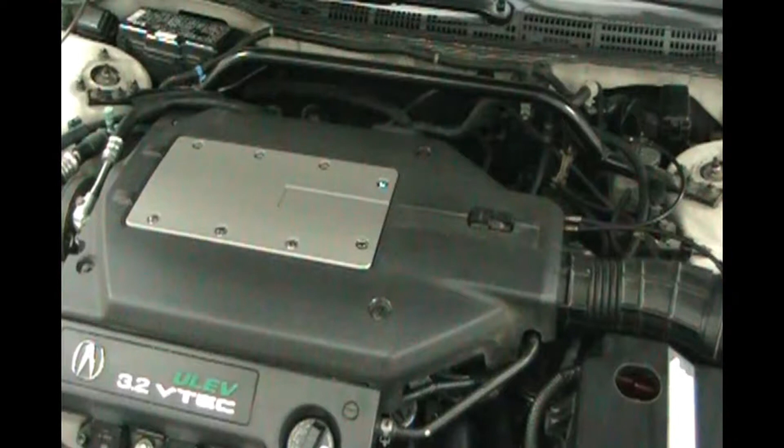So today we're going to put a set of valve cover gaskets on this 3.2 Acura TL. It is a 2000 model year. So you want to do this occasionally, maybe every 50 to 100,000 miles, to prevent oil leaks inside your spark plug tubes and oil leaks from coming down here. Like I say, start high, work down to find oil leaks.

We're going to change the valve cover gaskets today and also adjust the valves while we're in there. It's a pretty big job to get torn down to get inside there. So once we got it open, we're going to put in a fresh set of gaskets, and we're also going to adjust the valve lash. And like I say, plan on 3 to 4 hours depending on how much cleaning you want to do as you go. Okay, so 10 millimeter on the 4 corners, lefty loosey.

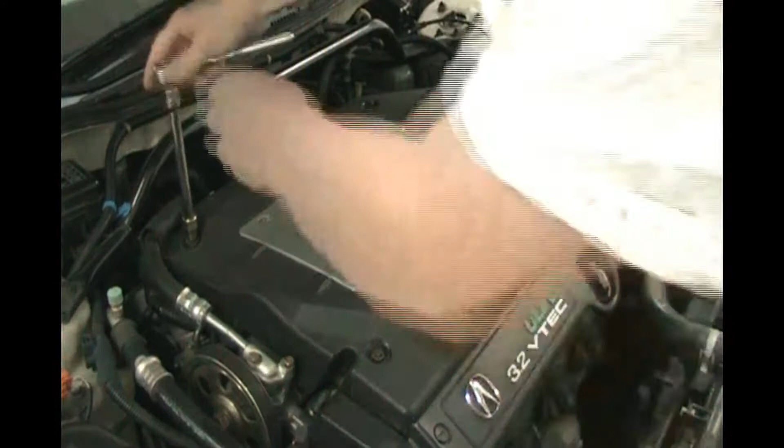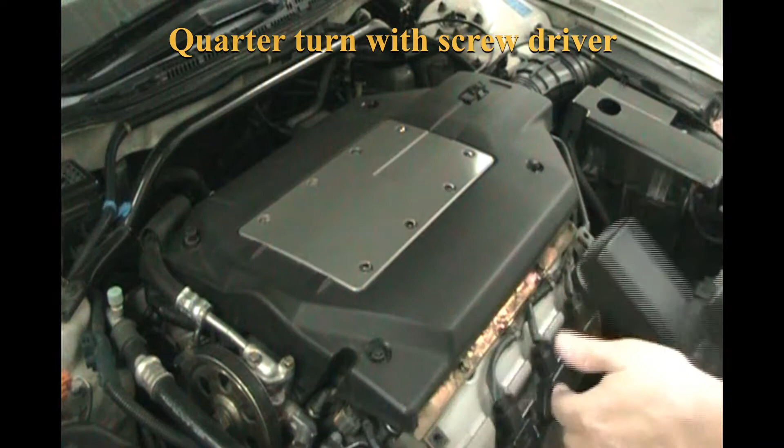Okay, flat screwdriver here, quarter turn on these two, take that right off, take that right off. So next thing we're going to do is take the air box and snorkel off. So the air box is just a number 2 Phillips. You can use a socket if you have the right size, or just a number 2 Phillips. It's 4 screws.

Okay, this cruise control cable is just held in place like that. Get out of the way. Airbox is almost loose. Okay, that's loose. Now there's a screw right here for the throttle body intake. Number 2 Phillips. Little hose out of the way. Pull this hose out. There.

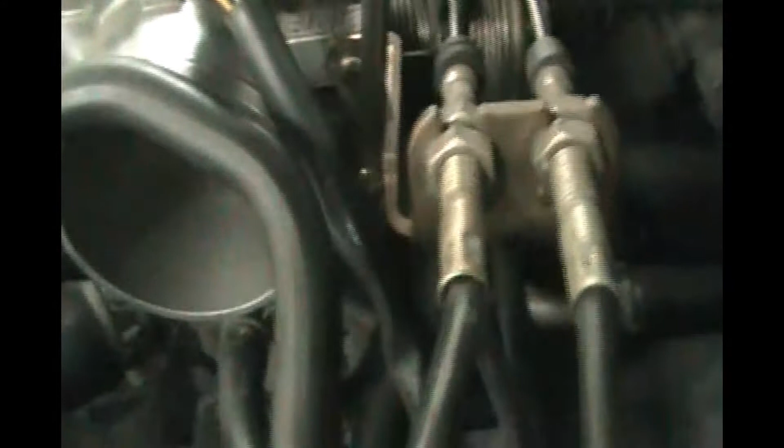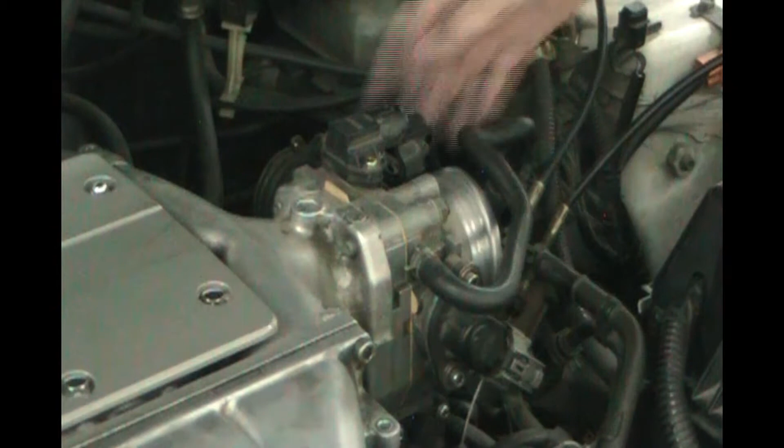We're just going to take the throttle cables off next so that we can get into here. So number 2 Phillips, 2 screws here that hold these cables. Then you pull this back and undo the end of it. So let me get those screws off. Okay, so we pulled the throttle forward and we got the two little ends off there. That's what they look like. Set that aside.

Now we're going to take the top cover off the intake. Looks like 1, 2, 3, 4, 5, 6, 7, 8, 9, 10. So 10 millimeter nuts. Oh, actually they're bolts, so a couple of them are nuts, some are bolts. This one's the nut. I won't bore you while I'm unscrewing all 10 of those. Okay, so we got the 8 bolts and 2 nuts off. Let's take this top cover off.

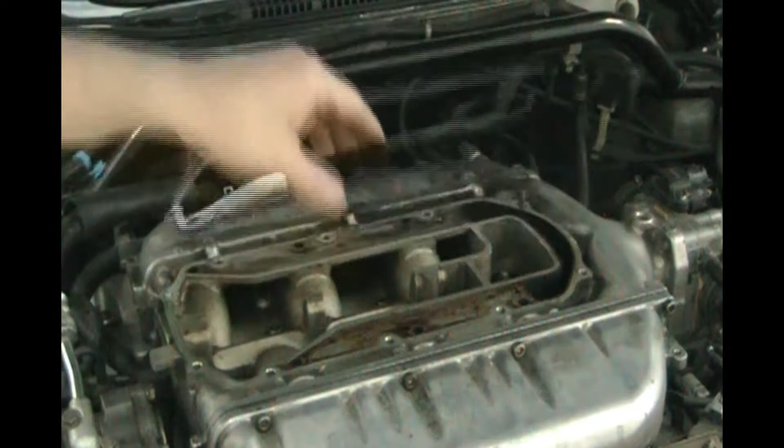And this is what is known as the beehive to Acura Honda technicians. So this can get all gummed up with carbon and it needs to be cleaned if you got EGR problems. And this is a metal gasket that is reusable, and it does need to fit one way. Set this cover down. So I notice this end has to go towards the throttle body. Don't turn it this way, get it upside down, because you'll see some cutouts here and they have to match up. Don't turn it over the wrong way. It'll be apparent to you when it's the wrong way.

Mechanics have done that time and time again. They've gone, well, I guess you can't go this way with it, the holes don't line up, but you could accidentally put it that way, which would be really not good. So I'll set these aside, but this is the beehive that occasionally needs cleaning. This one, the passageways, even though they're black, they're not plugged anywhere, so I've cleaned that before.

There's a couple things in the back to unhook. There's a vacuum line here to unhook. There we go. So that hit the ground at least. So I'll get that off the floor. Okay, so this vacuum hose is actually the positive crankcase ventilation valve, PCV. So we'll set that aside.

So we have an air intake temperature sensor to unplug here. Just squeeze the connector and pull it off. Got a vacuum line here, skinny one. Just put that up here so I don't forget to plug it back in. And we got a, looks like a brake booster vacuum line.

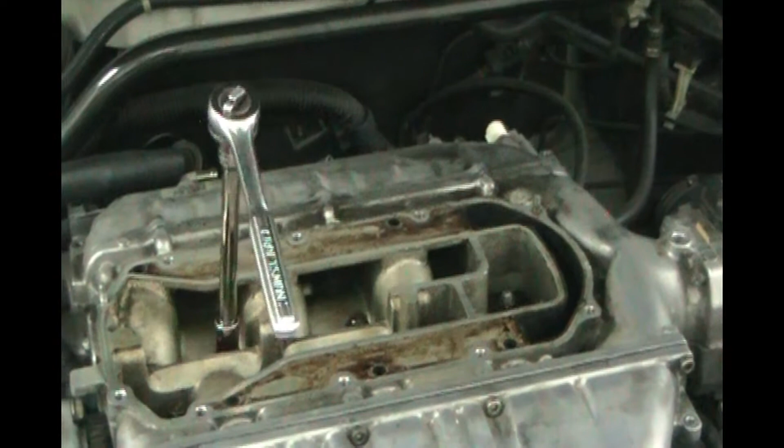Okay, so that's off. Okay. So now there are several bolts. Let's see. 1, 2, 3, 4, 5, 6, 7 bolts and 2 nuts down inside there. They're a little bit oily, but we will take those off. So these are 12 millimeter. And they're on there pretty good. And they are torqued with a pattern, so let's get all those out.

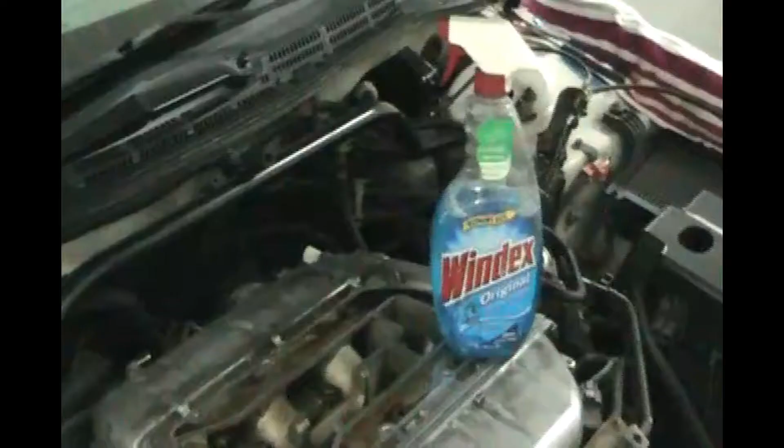Okay, since it got a little greasy and oily, you know what really works as a good hand cleaner? Windex. Spray it on a paper towel, wipes all the grease and oil right off your hands.

Little plug for Windex. Okay, so we got 2 more electrical connectors on the throttle body, throttle position sensor, and then the idle air control valve, IAC. That's the bottom one. And that has been replaced on this car probably a year or so ago. That's a little tight. Let me get a screwdriver to wedge in there.

Okay, so idle air, throttle body, throttle position sensor, those are unplugged, out of the way. Got all of our nuts and bolts in there loose. And looks like we have one more vacuum line right here to come off. Some pliers. Okay, one more vacuum line to take off here. Boy, that rubber hose is getting pretty dried out. Not so flexible anymore. That's okay. It doesn't need to move, so we'll just set that aside.

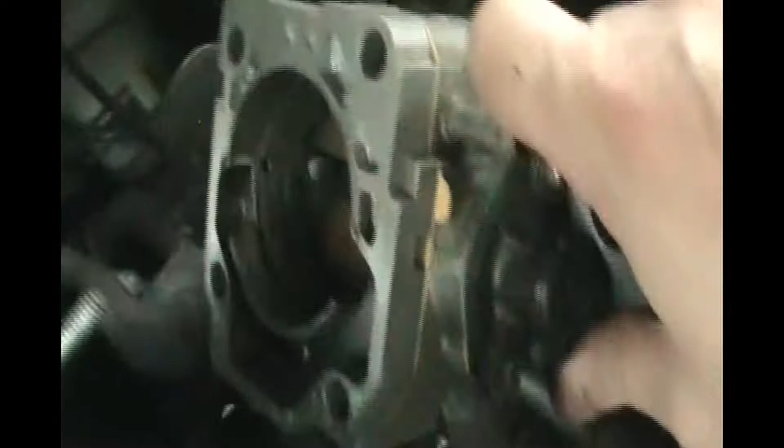Okay, without taking off the manifold, I was able to slide it off those 2 top studs, tilting it down a little bit and pulling it off, and just set the throttle body aside. And you know, you could clean it while you got it out, paper towel and some Gumout or something, throttle body cleaner. This one's been cleaned before, it's not too bad. You can clean the front side. Front side's pretty clean. Back side is usually a little more dirty, but you can clean that while it's out of there. And you can see the 2 water lines there, 1, 2, in and out.

So there is a gasket on here. It did not tear. That's good. It's a relatively new gasket. And if it tears, then that's the time to replace it. They're only like $1 or something.

Okay, so we're about to lift the intake manifold off. I want to make sure I gave you the right count before. So as far as bolts, there's 1, 2, 3, 4, 5, 6, 7. And then nuts, there's 1 at each end, 2. So there's 7 bolts and 2 nuts. So we'll set those aside, and then we'll lift this intake manifold by holding these 2 throttle body studs on this side and this little boss tab on the other side. It's already loose, we'll just lift it off of there.

Okay, so lifted the intake manifold off, set it on the floor. It's one big piece. I don't know, probably weighs 20 pounds. And now we got the lower intake. And you want to cover these with some paper towels or cloth or something. You do not want nuts, bolts, tools falling down inside there.

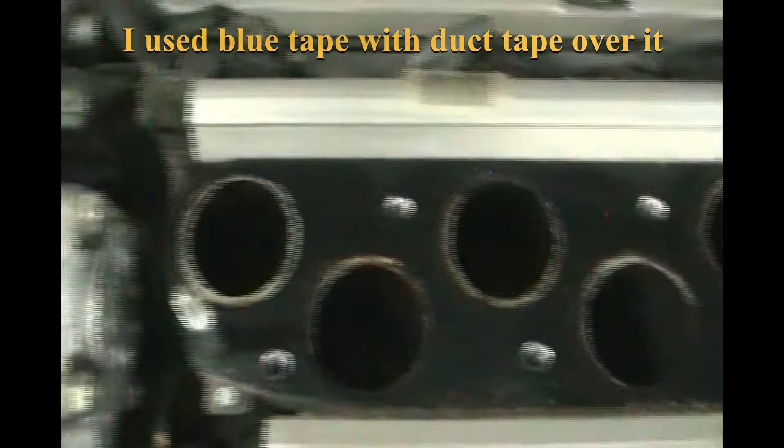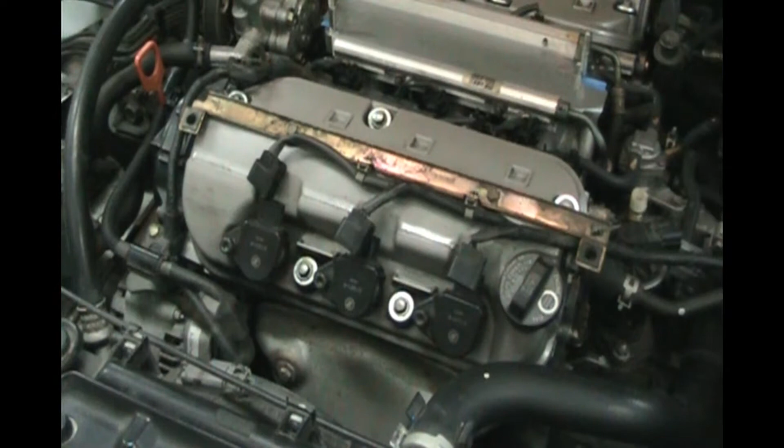Okay, now we're going to use a number 6 hex key to loosen the set screws for the coils. Let's just unplug each of these, squeeze the connector, pull up. Do that for all 6. Since this is a Japanese car, of course, when I said number 6, I mean 6 millimeter metric hex key.

So we got the set screw out, and for the coil, just give it a little wiggle, slide it out. And you want to make sure that this boot comes out with the coil. Make sure it's not stuck down there on the spark plug.

So we need to get this rail out of the way that holds the electrical connectors for the coils. So this is 10 millimeter. Just 2 bolts hold that in. Swing this up and out of the way somewhere, over by the battery.

So let's get this air hose off of here. That'll be fine. Let's get that out of the way there. Now we take these 1, 2, 3, 4, 5 bolts off. They are 10 millimeter.

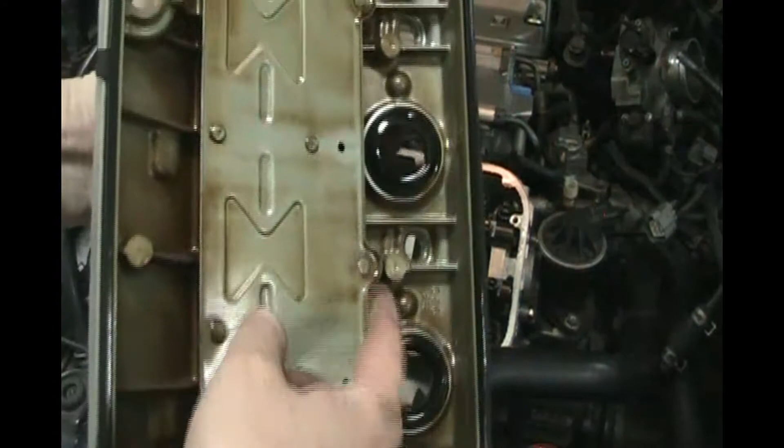This is a sideways V6 engine, 3.2 liters with 4 valves per cylinder. So you have 2 intake, 2 exhaust. This is cylinder 1, 2, 3, 4, 5, 6. So this is cylinder 4. And you got 2 intake, 2 exhaust. And the camshaft goes right through there. And this is a VTEC engine. So based on oil pressure, there's a VTEC actuator, and then it can move on to different cam lobes at higher RPMs. So we're not messing with VTEC today.

The only thing we have to do today is replace the valve cover gasket, because we don't want any leaks coming along this edge here. Some of this is road grime and some might be leaking oil. Remember what I said about finding an oil leak? Start high, eliminate all leaks up high, because you could have oil dripping down that you think is your oil pan because it gets to the bottom, and it's not your oil pan leaking. It could be the valve cover gasket leaking. So start high when looking for leaks.

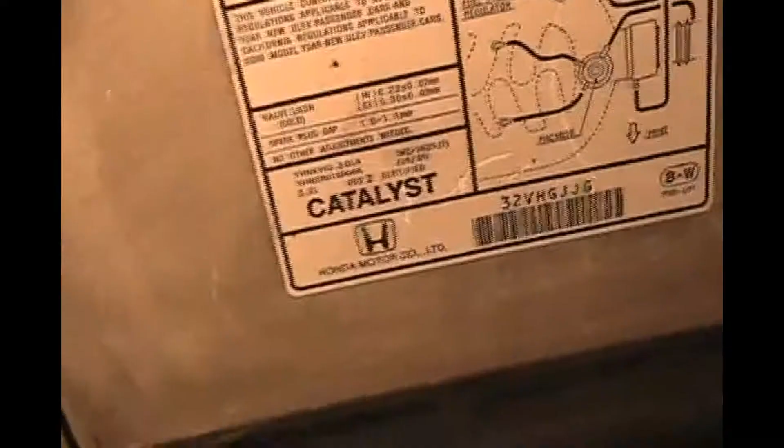And when we adjust these valves, we are going to look at the hood. It says valve lash intake. Let me get a close up of that for you. So on this hood it says cold, so we have to have a dead cold engine. Valve lash intake is 0.22 plus or minus 0.02 millimeter. Exhaust is 0.30 plus or minus 0.02. So on our feeler gauges we want a 0.22 for the intake and a 0.30 millimeter for the exhaust.

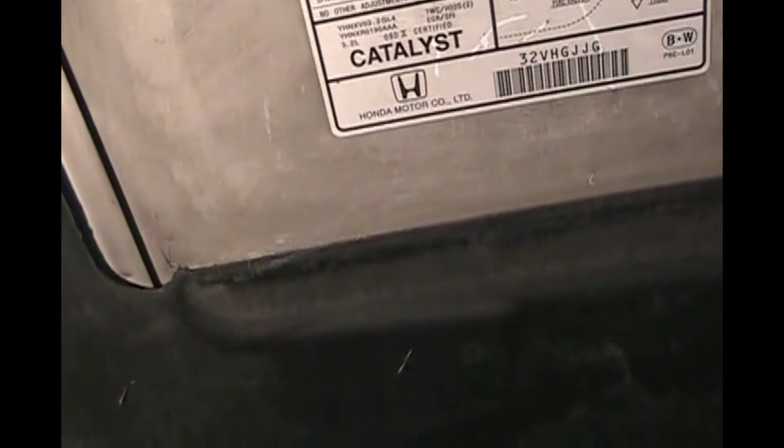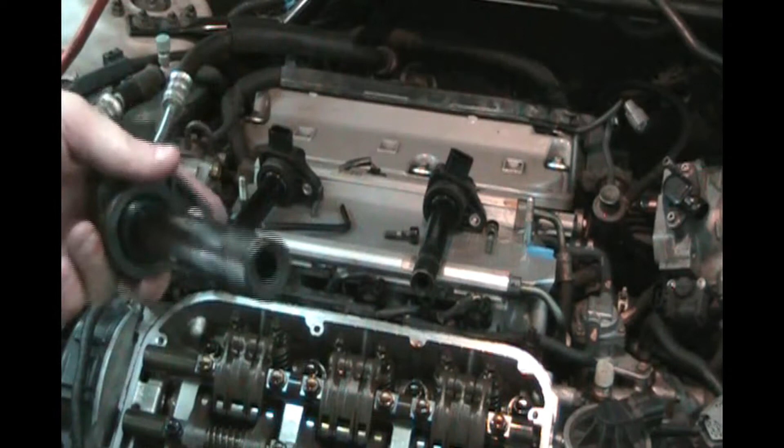Okay, so the other thing that you want to take care of when doing the valve cover gasket is, this is the number 2 cylinder coil. There's a little bit of oil that got through into the cylinder, not much. I'll show you on the front bank, there's an oil seal around here on the valve cover, and if that goes bad, oil can come from here and get into there, and that could affect your spark. So if this was swimming in oil, that could be a problem. There's just a tiny bit. It doesn't look like it got up inside, so we caught this in time, and we'll be taking care of that problem today.

The rear valve cover is a little harder to get off because you got this power steering in the way. There's a 10mm bolt right here that we can take out, and you got this electrical in the way, so there's a 10mm bolt we can take out, and both of these can just be pushed up enough to pull this up and out. Okay, so the same thing on the rear bank. This one here is the only one with a short bolt, so I'm going to put some tape and mark that as well on the rear bank.

Okay, so on the plastic electrical rail, there's actually two bolts. There's one over here. I just taped it up here so I can remember to put it in later. And there's also one right here. So you need to get this one out as well. And then we can lift up the electrical and get that out of the way. Okay, so I just used a piece of string, lifted this up and just tied it out of the way. And we should have enough clearance to lift this cover up and out of there. There we go. We've got all 5 bolts out. That gasket is sticking on there, so that's okay. We're going to replace it with a new gasket.

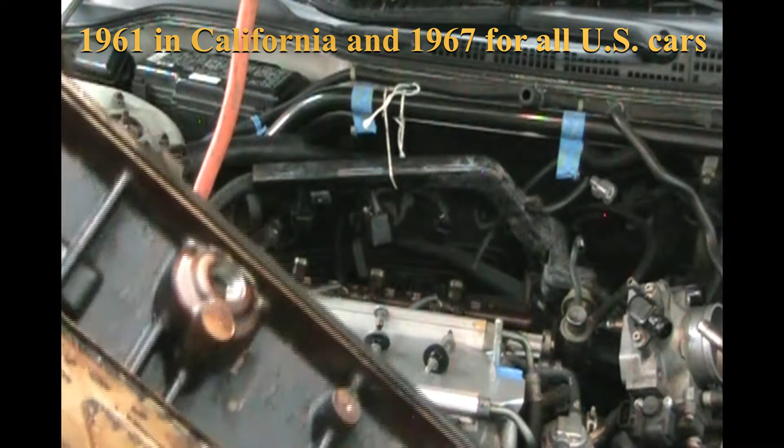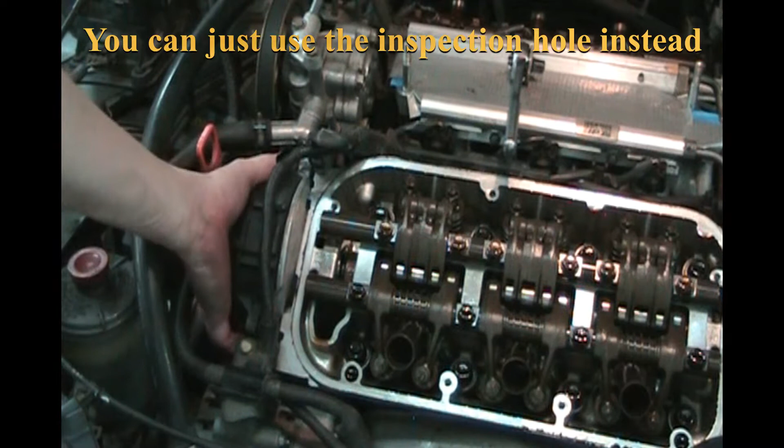It's a pollution control requirement since 1961 in California and 1967. So we'll clean it up as best we can. That's just what happens with high mileage. So on the front bank, I'm going to take off this cover. There's 5 bolts that are 10mm, and then you slide it up and then away.

Well, there's the dipstick for the oil that's in the way, so we might have to loosen that bolt. Let's see if we get it out by wiggling it a little more. Yeah, it looks like the dipstick's not the only problem. This belt is also a little bit in the way, so I might have to loosen the belt to get it off. Let me do a little more wiggling. Okay, so I got the bolt out for the dipstick.

You know, it's really unfortunate. If Honda had just made this dipstick tube 1 inch shorter, and the stopper on the dipstick would be adjusted for that 1 inch shorter, then this cover would clear it without having to remove that bolt that's really hard to reach.

So we have had to remove the power steering belt and the bolt for the dipstick tube just to get this to clear the pulley. What a pain. So there's 5 bolts, 1, 2, 3, 4, 5. Then this cover comes off. There is a little window that you could look through here, but I've never found that very useful. And for this video, I want to have the pulley exposed so I can make it clear to you what we are doing on the pulley.

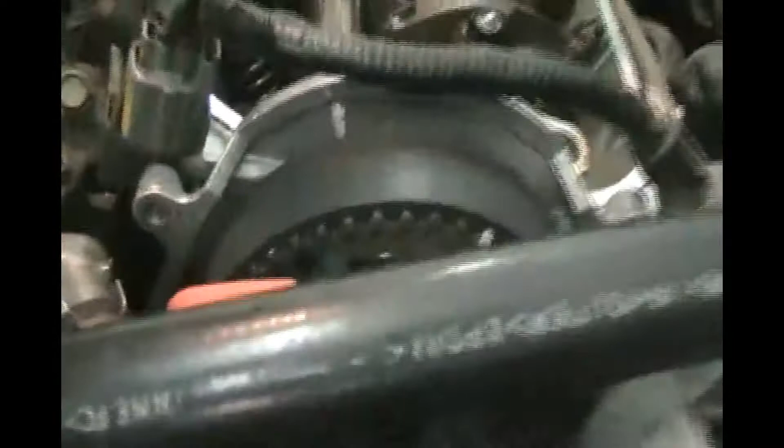So what we want to do is move the engine so that we have this number 1. There's markings on here, there's 1, 2, 3, 4, 5, 6 on this pulley, and I'll show them to you with a close-up in a minute. We want this number 1 top dead center, straight up and down, so that we can do our number 1 cylinder valves back here. We need number 1 at top dead center. Just like when you're putting on a timing belt or statically setting your ignition timing, you want number 1 first, top dead center.

So we have our right front tire. We turn the steering wheel all the way to the right, and we have a 19mm socket through that hole there. It's flexible plastic, so you just push through. And we got some extension bars, and we got a torque wrench. If I get far enough back to show you what we got here. So the car's on the ground, so turn the steering wheel all the way to the right and put your 19mm with some extensions. I just used a floor jack to make it easier to turn this.

And we want to turn clockwise until we got number 1 at top dead center. In this case, I'm going to go a little bit counterclockwise to take a shortcut to get started. So I'll go a little bit past it. There, a little past it. Now I'm going to go clockwise. So on this wrench, I'm going to push towards the front of the car, that's clockwise. And then I'm going to watch the marks on here line up, going clockwise, clockwise.

We want to be straight on looking at that. Get the dipstick out of the way here. Let's see if I can get the camera in there.

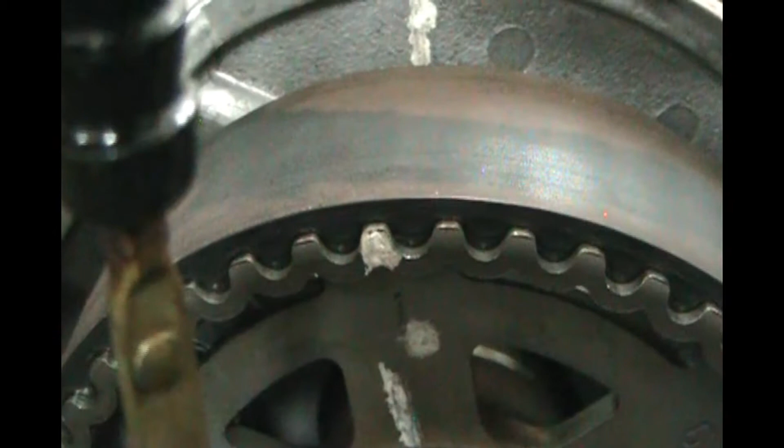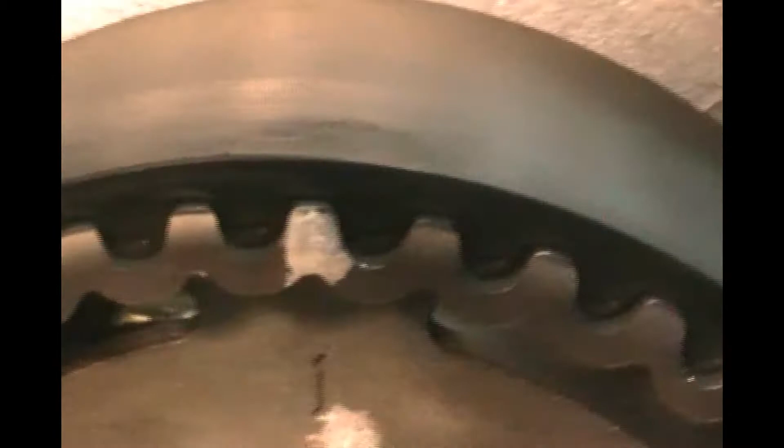There. Okay, number 1. And you see the number 1 marker on the pulley. Let it focus there. Let me get some more light for you. Number 1. And we want that to be lined up with top dead center.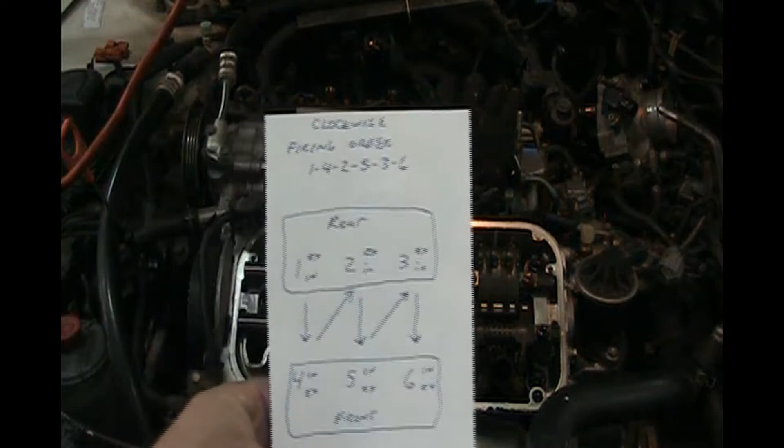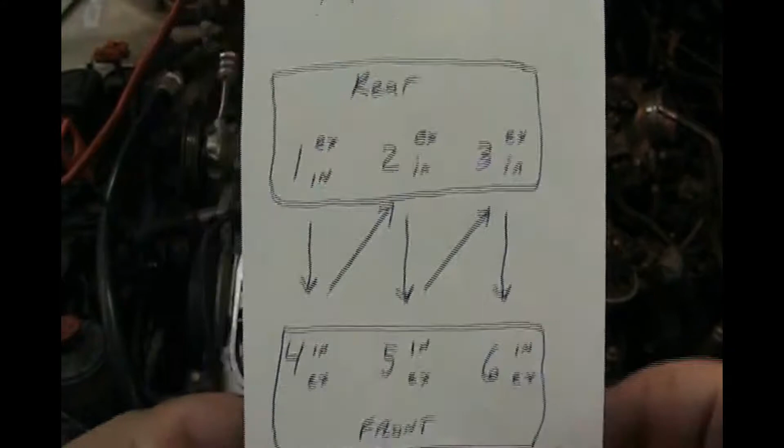Now we are ready to set the number 1 intake and exhaust. So on this engine, see if we can focus on this paper here. We always want to turn the engine clockwise, and the firing order is 1, 4, 2, 5, 3, 6. So if you look at the engine with the rear cylinders, number 1, 2, 3, front bank 4, 5, 6, and this is where the belts are on this side.

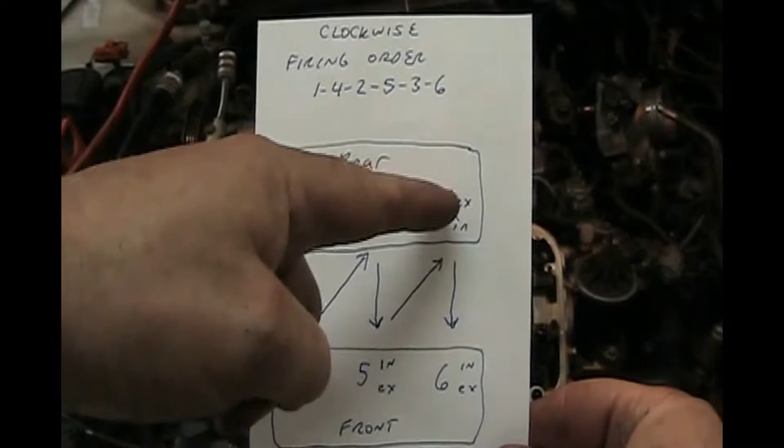So just like we set on the firing order, hopefully that's in focus, we're going to set number 1 intake and exhaust, then 4, 2, 5, 3, 6. That's how this Acura engine fires.

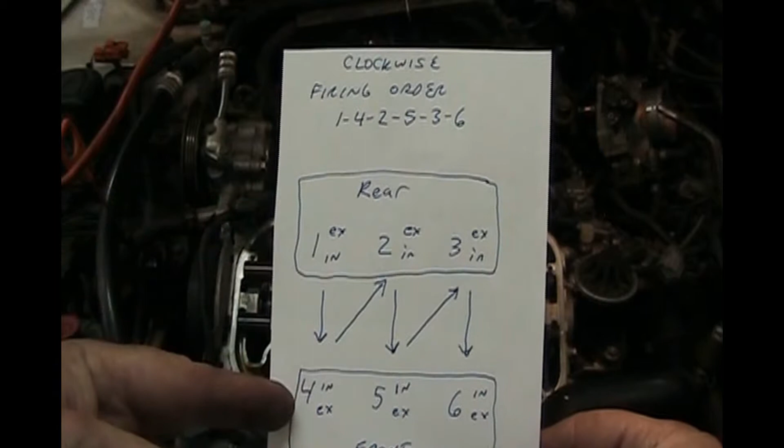So we're going to do top dead center, then we're going to rotate the engine to number 4 that's marked on that cam pulley. When that's straight up and down, top dead center, we'll do number 4. We look for the number 4 on that cam pulley. So 1, 4, 2, 5, 3, 6. And each time we have to rotate the engine clockwise until we see this number 4 on the cam pulley, then number 2, number 5, number 3, number 6.

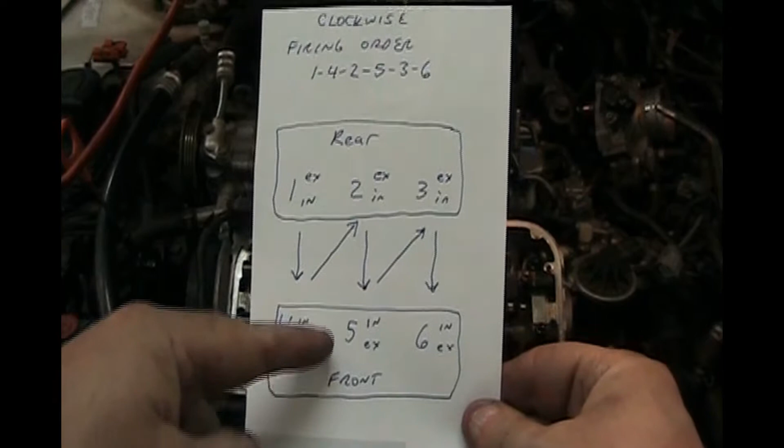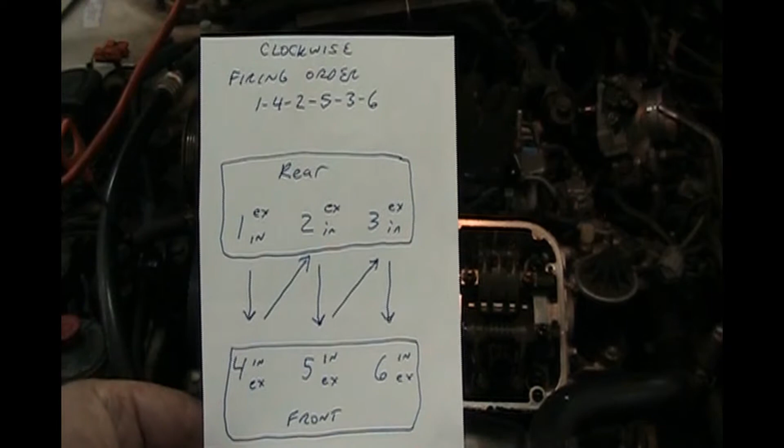And we're going to set our intake to 0.20 millimeter, exhaust 0.30 millimeter, and you can be plus or minus 2. So on that 0.20 you could be 0.18 to 0.22, that's plus or minus 2. And the exhaust 0.28 to 0.32.

So let's get started on setting these valve clearances. It's going to take about an hour to do. You got 24 valves, and it'll take about an hour. It took us 45 minutes to an hour for the teardown, an hour for setting the lash clearances, and then maybe an hour or less to put everything back together.

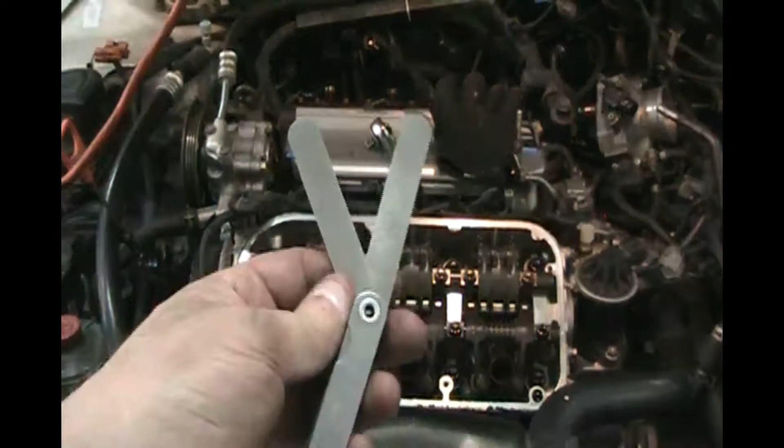Okay, so I got my feeler gauges. I wish I had longer ones, but when those big YouTube checks start rolling in someday, hopefully, I'll get some better feeler gauges.

So these are metric, so we got 0.20 millimeters going to be our intake. The ones closest to the intake manifold, that's your clean air coming in, so that's intake. And the ones by the exhaust manifold, that's your exhaust down here. So intake, exhaust. Same in the back. Close to the intake is your intake valves and exhaust. So it's easier to show you on the front, but I'm not on the number 4 cylinder yet.

So you slip this under here, and of course we're not aligned on the right cylinder, but you slip this under just so it moves, if it's lubricated with oil. It'll move in without binding. If it's stuck, then you have to undo the nut here, and then use a screwdriver and turn that a little bit. Now in valve adjustments, you should never have to make radical adjustments. If you do, you might be on the wrong cylinder.

So these should need very minor adjustments, if any at all. Okay, so check to make sure you're on the right cylinder on this cam pulley mark when you're working on it, to make sure you're not doing radical adjustments, because you might be just doing the wrong thing.

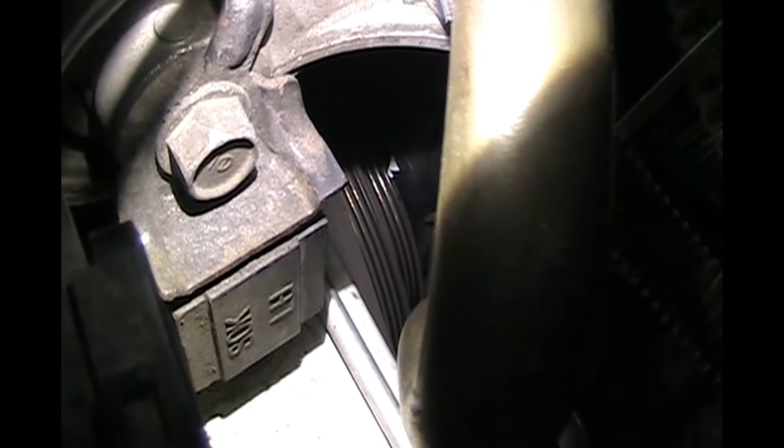So just a refresher before we start, if we look at our timing mark, get a bright light down there. Look at our timing mark down there. Move the camera in there. There we go. Can you see that arrow lined up with the crank pulley? And we are at top dead center on the crank, and we are at number 1 on the cam pulley. So we're definitely on number 1.

So we're going to go over here to number 1 and do the intake valves first, then the exhaust valves. So 0.20, 0.30, just like it said on the sticker up there, for intake and exhaust. So here I've got the 0.20 feeler on an intake valve, and it's good. It's just grabbing just enough as I move it in there. It's not binding and it's not super loose.

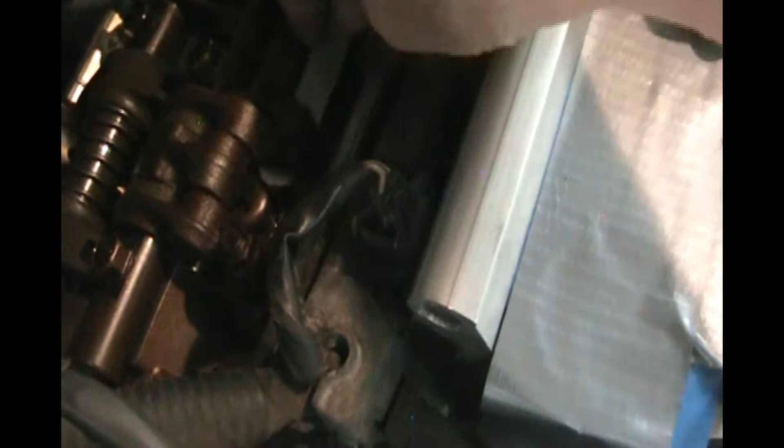So this one on number 1 looks good, and there's 2 valves for intake and 2 for exhaust, so you got to do both of them. It's a little hard to get in there, that's why I wish I had longer feeler gauges, but do your best to get that feeler gauge in there as best you can.

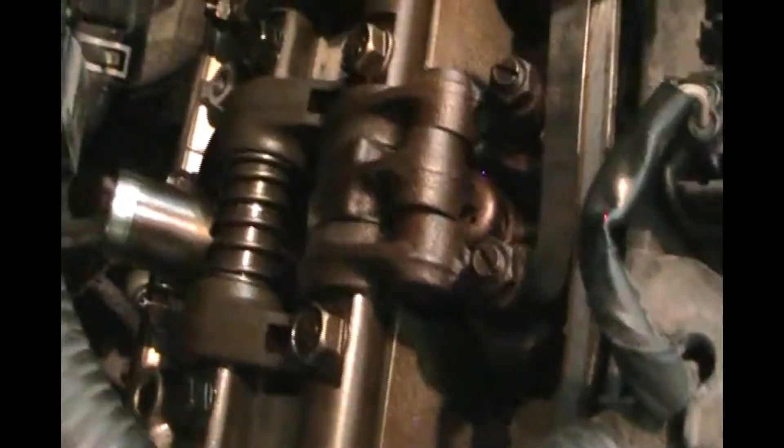So if you have to adjust any of them, I use a 10 millimeter socket to bust it loose, and then when I go to adjust it, I'll use, like this, a 10 millimeter, and I'll get it adjusted where I want with the feeler gauge.

So I have the feeler gauge under there, and I'll adjust it where I want it, and then I'll hold it with the screwdriver, and then I'll tighten the nut, because if you tighten it like this, it could move the screw. So get the screw adjustment where you want it, hold the screwdriver, and then tighten the nut.

Okay, I was out of frame with that, but put your feeler gauge, tighten to where you want it, and then hold the screwdriver and then lock the nut, and then check with your feeler gauge one more time to make sure it's where you want it. Because once you're done with a cylinder and you go to the next one, you can't go back unless you crank all the way around again to that cylinder. So you want to make sure all 4 valves are right on number 1 cylinder before going to the next one.

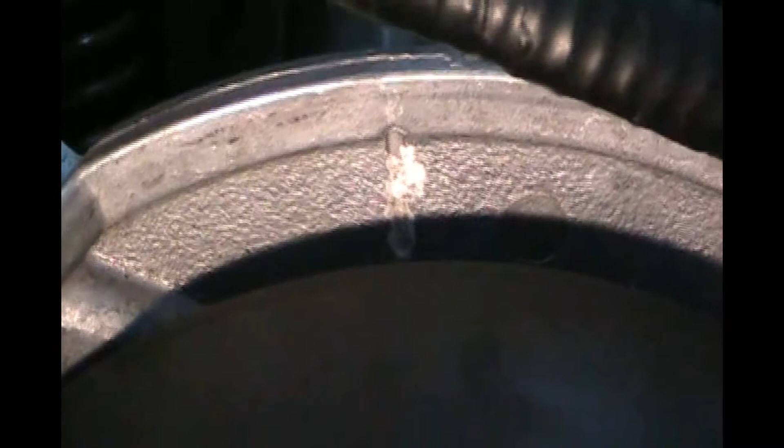Okay, now we're going to crank the engine clockwise to number 4. So that would be the next position on the pulley. Okay. Show you that up close if I can. So there's a number 4 there, and we're going with that square indentation and lining that up with the mark up there. So we have that exactly on number 4.

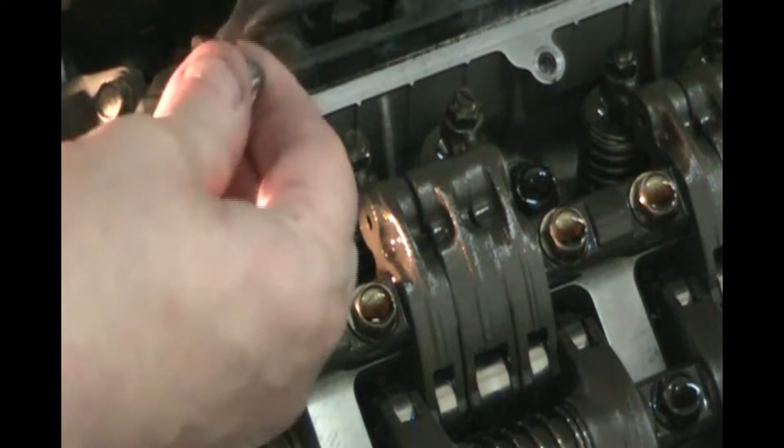Okay, since we're on the front number 4 cylinder, it's intake 0.20, so I'll show you how I do this. This gauge just slides under there. It's not binding. When you use these gauges a lot, they get curved, and that's good because that's the shape you want to get it under there. So that's good. We don't need to adjust that. It's not binding, it's not super loose. So that's good.

Now let's do the exhaust. Switch feeler gauges here. Exhaust. Wiggle that under there. That feels good too. A little more light for you there. So that feels good. Should just be able to push it under and move it without binding. When it's lubricated, it's got some oil on there. If it's totally jammed, you need to loosen it. If it's way too loose, there's no resistance, you need to tighten it.

Let me get around the other side where I can reach that better. And the exhaust now. I don't know if I was out of frame on that last one, probably. So stick that feeler gauge under there. It just fits under there. Tiny bit of resistance. It's not too loose, too tight. There we go. So let's do the one right next to it.

Get our feeler gauge underneath there. We gotta kind of work at it to get it under there because these are a little stubby and I wish I had longer ones. Okay, this one's not going under so easy. There we go. Okay, so it's going under there and there's not a lot of resistance. There's a little bit of oil on there and it's sliding under pretty good. So we don't need to adjust this. Okay, so intake are done, exhaust are done. We're done with number 4 cylinder.

So now we're going to move on to number 2, which is the middle one in the back. So middle in the back where that screwdriver's pointed at. That'll be our next one, but we got to rotate the engine and get the front cam pulley to say number 2 on it with the top mark lined up.

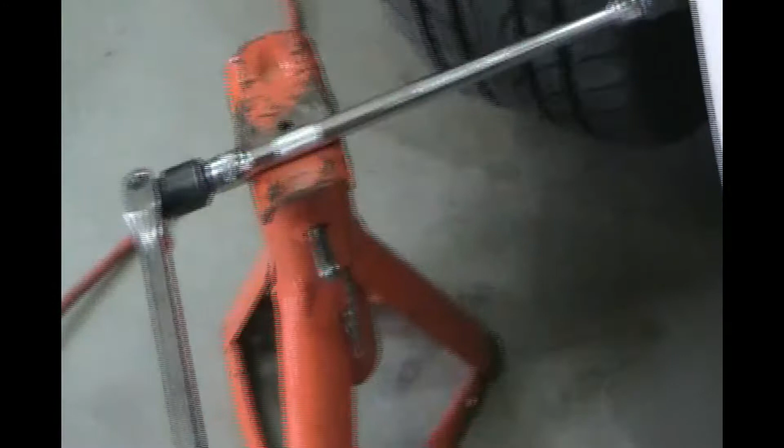Now we rotated our engine clockwise and we watched the front cam and we got this number 2. You see how the letters are off a little bit. They're not centered, so we go with the square mark because right above it in the tooth there's a very fine little line there. That's the mark. And we go across and line it up with that mark in the cam cover. So we are on number 2, which is the middle cylinder in the back. So we're going to adjust the intake and exhaust on number 2.

Okay, we finished number 2. Now we're going to go to number 5. So let's rotate the engine to number 5. Okay, so we're going to rotate to number 5.

Close up there, get some light on it. So there is number 5. We're going to go with the square mark there, because there's a little fine line right above that square, a fine mark in the tooth, and that tooth lines up with the white mark in our cam cover. So we are number 5. And number 5, if we look at the engine, it is the center one front bank, because remember we are 1, 2, 3, 4, 5, 6, so 5 is the middle one.

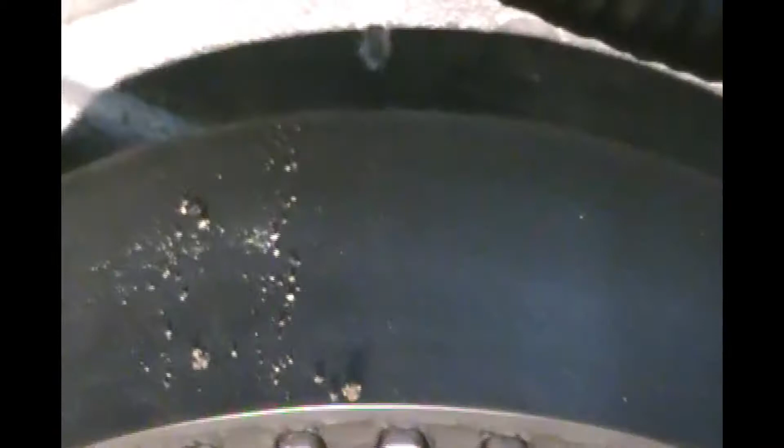Okay, we finished with number 3 cylinder. Now we're going to do number 6, which is the last cylinder. So clockwise. Show you close up. Too close. Cylinder 6. So that mark just above the number 6 on the tooth is lined up with the white mark, so we're ready to do number 6 valve adjustment.

And number 6 is the furthest from the belts on the front. Just remember how it goes: 1, 2, 3, 4, 5, 6, and the rotation is starting with number 1. So the rotation goes 1, 4, 2, 5, 3, 6. So we're on number 6, which is the last one on the front bank.

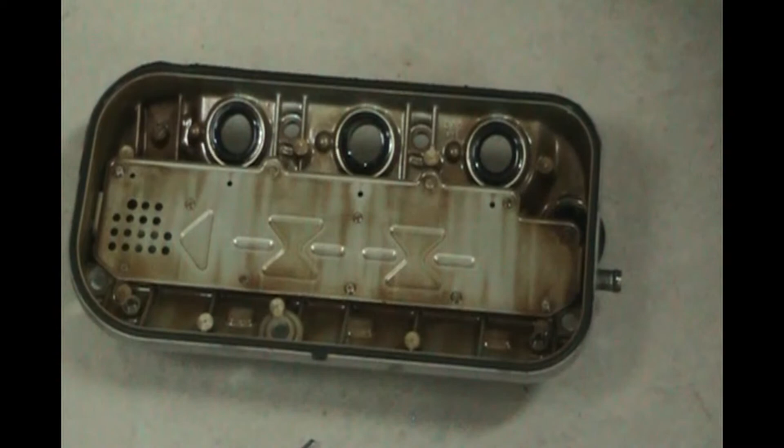So first thing we got to do is pull the old grommets and gasket off of the old one. So let me show you how to do that. You could buy an oil seal puller, or you could just use a screwdriver. But I'll show you how that's done here. Work your way around. Try it with kind of a wide flat screwdriver. And these things, if you pull at them, they're just going to tear apart. So work your way around. There we go. And it just pops out.

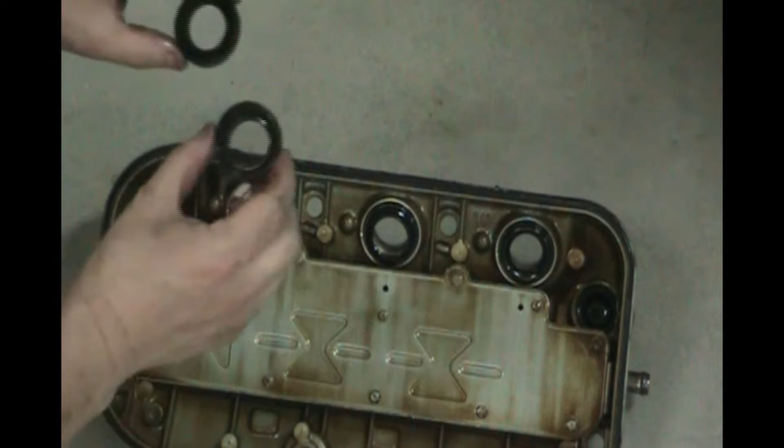So compare that with the new one. They look pretty similar. The old one's a little worn in the middle. These are actually Acura and these are Fel-Pro. So we'll clean that and we'll take the gasket off the outside too. Take that off. It's not glued in place, it's just fitted.

Well, you can see number 2 was leaking, and when I pulled the cover off, this thing went inward, so looks like it didn't have the best of seal anymore. So wiggle that one out. Number 2 is the one that got a little bit of oil down in the spark tube, but not a whole lot. So you get the point. Just work those out, and then I'll show you how to put the new ones in.

If you got an oil seal puller, like this one, see if I'm in frame. This oil seal puller looks like this. You can use that as well. You can fit it in there and work your way around. There we go. Screwdriver might tend to put some little marks on there. That's not a machine surface for any real purpose, because when these are in, there's a little gap anyway, but you can use this to get under that edge if you got some space there. Because these don't sit all the way flush. So I've got a little gap in this one.

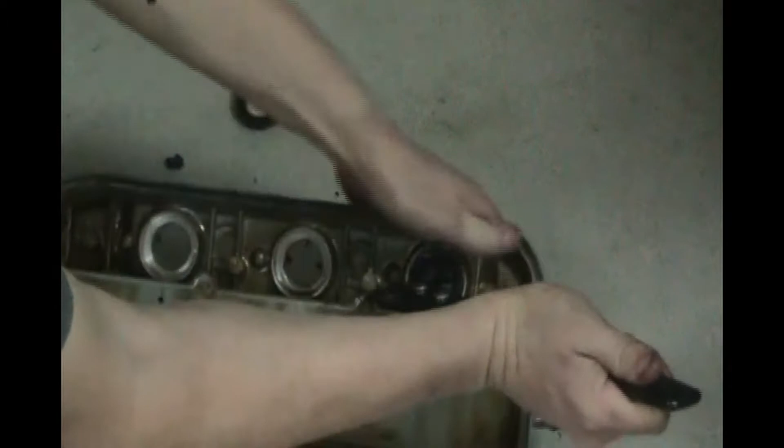There we go. So this won't leave screwdriver marks on that surface there, but like I say, it's not a big deal because these don't sit all the way down in there. When you put the new ones in, you just push them in a little ways, and you don't push them all the way down in. You might put a little motor oil on there, push them in a little bit, and then when you put the valve cover on and tighten it down, it's going to seat it the rest of the way that it needs to go.

If you push this in all the way down to that surface, I'll show you with the screwdriver. If you're all the way down to that surface, these things are going to leak. So don't push them all the way in.

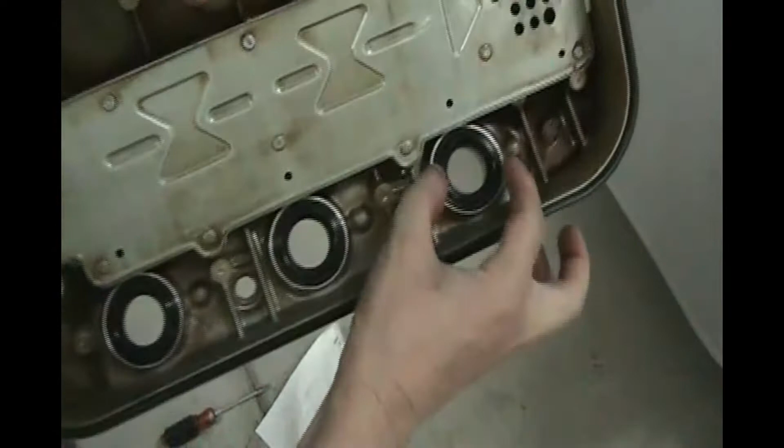Okay, for the front valve cover, we got the gasket in, a little tab goes on the outside, and just press it in. And then these, with the crown up and the flap down in there like that, are just pressed in by finger. You don't need to hammer them in. So just put a little oil on them, press them in by finger, get them as even as you can. Now we're ready to put it on the car. Okay, so we're ready to put the front valve cover on the head. Just push these wires out of the way and set it on there as evenly as you can.

Spark plug holes are going to have to line up. So look in those holes and line them up and push them through. It's flexible rubber, so it's going to push through there. There we go. So we got the 3 holes. This is cylinders 4, 5, 6. And the rubber did not bind at all when it went on.

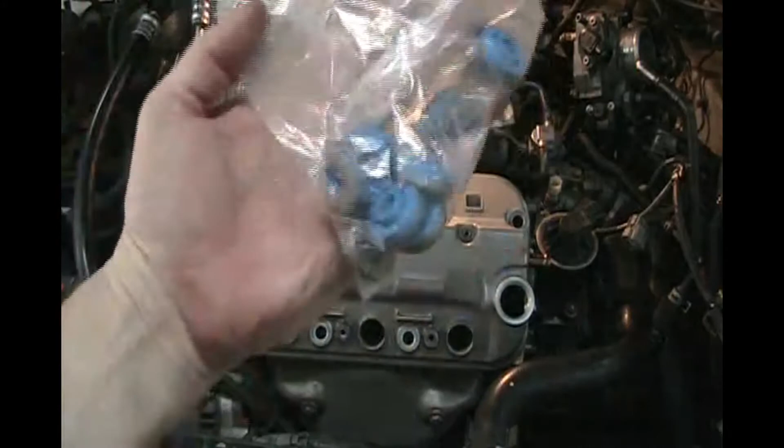Now I'm going to show you how to do the grommets for the bolts. Okay, the Fel-Pro kit comes with a bag of new grommets with the metal. It's not as shiny. I might keep the old metal. Okay, so for the old ones, I just use a screwdriver to pry between the rubber and the metal. And then once you got that separated, get some wire cutters.

You're not using this anymore, so just cut that rubber part off and throw that rubber part away and keep this, clean it off, and we're going to reuse it. That, if you want to take it off, you can. The rubber part, I'll show you how to get that on, the new rubber part.

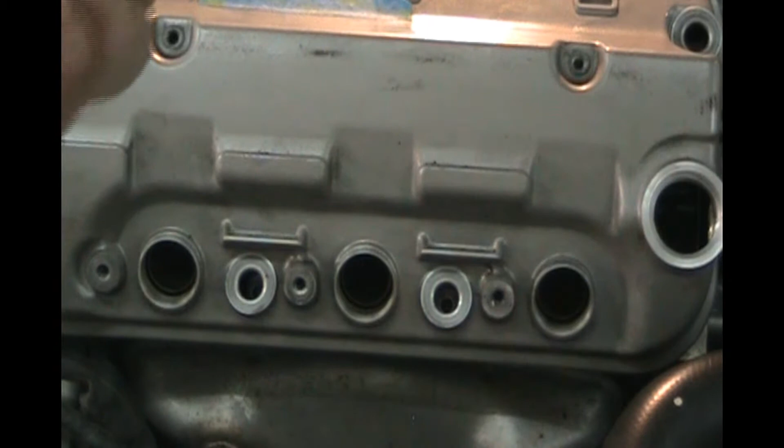So the way I get the new rubber on, here's the new one. Put it over like that, and then I'll take the metal ring from the old one and just put it like that. It's temporary. You take this and you thread it in like that. Just start cranking it in there until it seats over that wide spot.

There we go. It's on. Now you can unthread that. And this is the old piece you don't need. Oops, out of focus there. So it's on there now. We don't need this old piece anymore.

So the new one, getting over that wide spot, the trick is just thread it in where it belongs on the engine. You know, we go in one of these. I'm sorry, one of these here. That's the short one. There we go in here. So that's where it would go. But just thread it over one of these with the old metal pushing. Any of these three would fit fine.

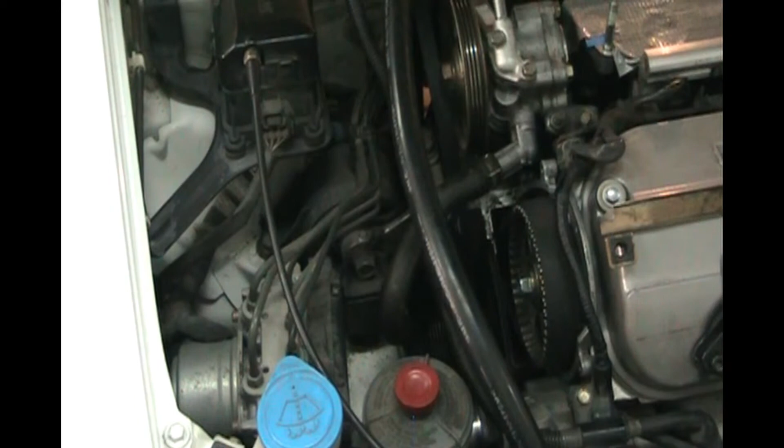So over here we need to put this cover on, but first, let's see, I guess the first thing would be to put the cover and the 5 bolts, because we had problems with the belts and the oil dipstick being in the way. So let's put this plastic cover on and 5 bolts first. Then we'll put the bolt for the dipstick, and then we'll put our belts back on and do the adjustment on this belt.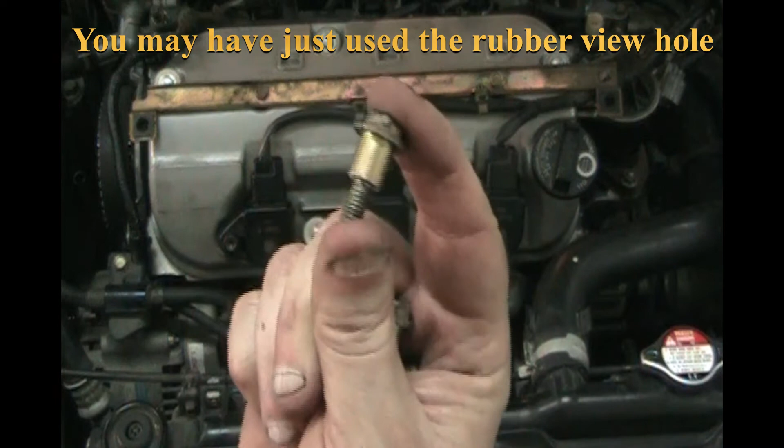Okay, so here's our cover that was a giant pain to get off. 5 bolts, and they're all the same. There are these little guys here, 10 millimeter, 5 of those. They're all the same. And the cover, remember, it has a notch in the bottom here, so it slides down. So push down on it and then put the bolts in.

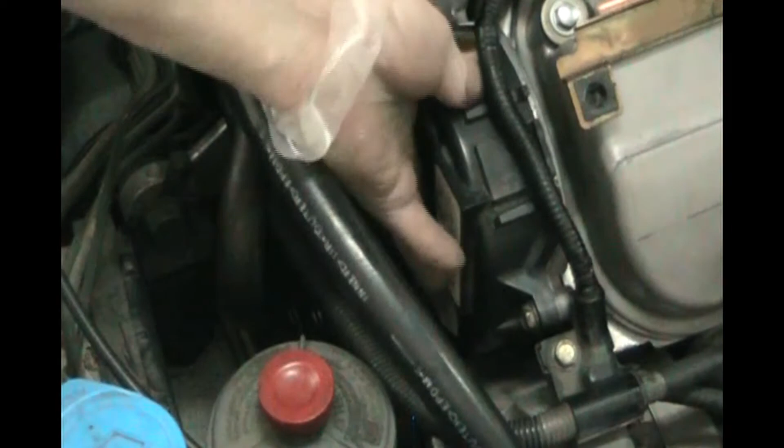Okay, so we got the front cam sprocket cover on. We got the 5 bolts in there, 10 millimeter bolts. Now let's put the oil dipstick bolt in there, and it is a 10 millimeter. Okay, so now we got the oil dipstick in. It's time to put the alternator belt back on.

So this is my special tool from JTC Auto Tools, number 3212, 14 millimeter, 0 offset. That's the key. It's really long. So we're going to push this power steering forward, towards the driver's side, and get this 14 millimeter on there, and then push it towards the firewall back like that. Put the belt on with your other hand, and then let go of the tension, and that will automatically tension the belt. So I'm going to do that off camera real quick.

Okay, this alternator belt is a grooved belt, and it also drives the air conditioner, so make sure the grooves are set properly on the alternator, the air conditioner, and the crank pulley. There's 3 pulleys that those grooves have to be on properly. So let go of the tensioner, check the belt. If you got to adjust it, push the tension off, adjust it with your other hand, and then let go of the wrench again.

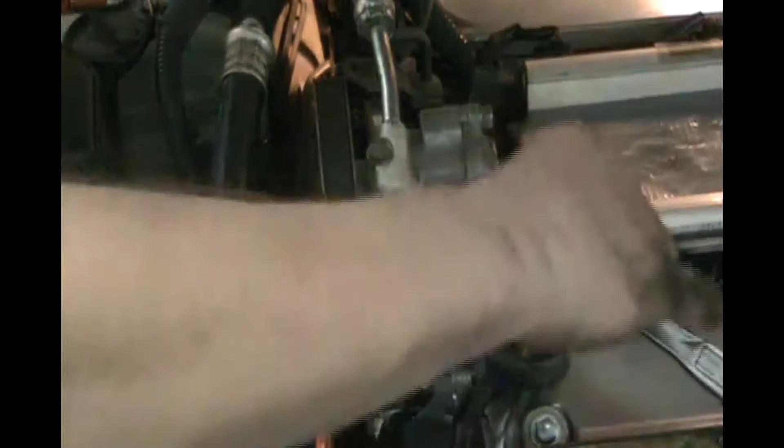So this adjusting nut is 12 millimeter deep socket. So adjust that until the belt is tight. You want to have no more than a 1/2 inch deflection at the middle of the longest spot when you press on it. So, need a lot more tightening than that. More tightening.

So now there are 2 other bolts that need to be tightened. Well, one's a nut. Let me get a bright flashlight so I can show you down there where those lock. This is the adjuster we just did. Now we're going to lock it in place. So that's our adjusting nut. And then below that, right there, is one locking nut.

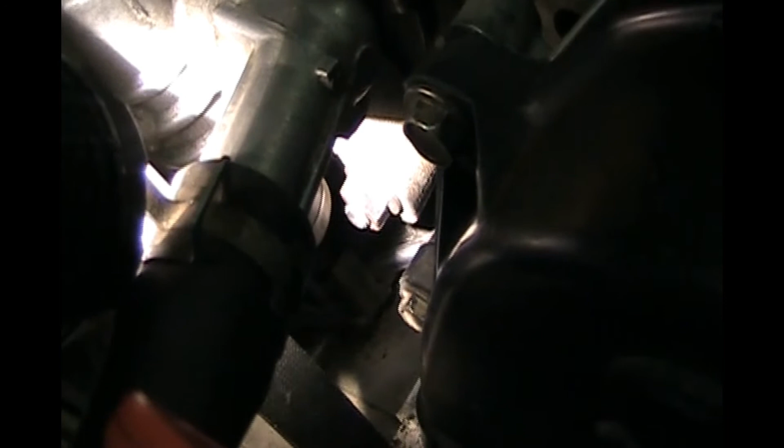And then over on the other side of the pulley is the other, so that's the bracket locking bolt. So after it's adjusted, you lock that in.

Okay, so now it's time to put the intake manifold on. So let's get rid of this tape that's covering the lower intake manifold. That made a nice little work surface. Also kept stuff from falling in.

Okay, so let's put our metal gasket on. Make sure all the holes are lined up. That looks good, everything's lined up.

Okay. Okay, so in here is 12 millimeter nuts and bolts. There's 2 nuts and 1, 2, 3, 4, 5, 6, 7 bolts. So torque them in a crisscross pattern.

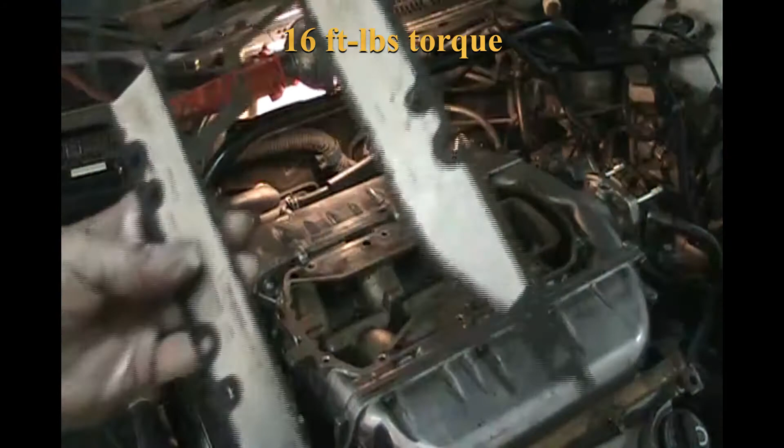Okay, so I cleaned up the metal gasket for the beehive. So let's put this on the correct way. It goes exactly like this. This square here, these EGR passages, 1, 2, 3, 4, 5, 6, they all line up. We can check those, see? They line up. EGR, EGR, EGR. Those have to be clear, or the car won't run right.

So that gasket is clean. Now let's clean the beehive. So this is the beehive before cleaning. These passages have to be clear for the EGR ports. There are 6 of them. 1, 2, 3, 4, 5, 6. And all these passages have to be clear. There's a lot of carbon in there, you can see.

So I'm going to scrape out the carbon, degrease it, use a little screwdriver, and clean as much as I can of this thing. Sorry about being out of frame. So cleaning all these passages so the EGR ports 1, 2, 3, 4, 5, 6, those all have to be clear so that the gases can get to those and go down to the EGR. So there's a lot of carbon in here. I'm cleaning it up as best I can.

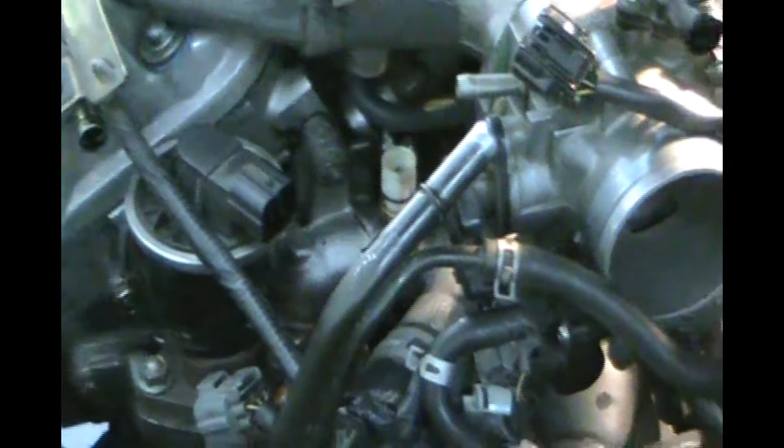Okay, so back here we plugged in our air hose, another air hose, electrical connector, and a little tiny air hose, and then our positive crankcase ventilation is pushed in. So that's all connected back there. Now we'll go over by the EGR and do some connections. We got several connections here. So we got our idle air control valve.

Get this out of the way. There we go. So this, I'll put it on last. Okay. Idle air control valve is on. Throttle position sensor is on. Coolant temperature sensor plugged in. EGR plugged in. And then this air hose to the front valve cover. Let me get pliers for that clamp. Keep that clamp out of the way so you don't cut yourself when you're turning the oil cap.

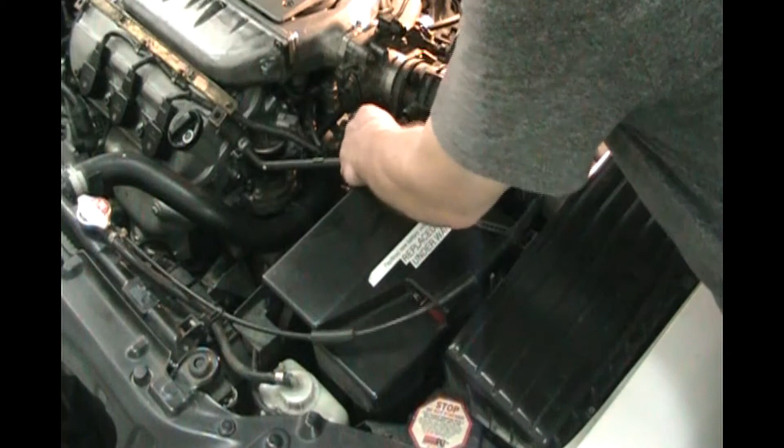So now we're ready for the snorkel air intake. So we'll do that next. So for the snorkel air intake, be careful not to chip up the fender. This is relatively new, so it's still rubbery instead of hard as a rock like the old one was. Get pliers for that clamp. Okay.

Air hose in. Another air hose on the other side, plugged in. This electrical through. This is the MAP sensor, MAP. This car does not have a MAF, it has a MAP, manifold absolute pressure sensor. That's what that is. I connect this air hose in front. Put that clamp on. Put this clamp on.

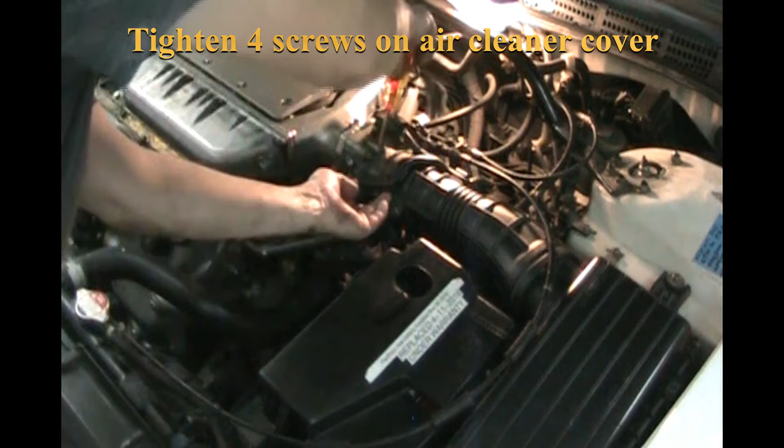This hose is routed wrong. It needs to go across the top. Move that. Okay, we rerouted this one across the top. So this goes in here in this holder, and in this holder, and on there. And move that clamp back on. So now that is the correct routing. Now take our number 2 Phillips and tighten our snorkel clamp. Okay, and now we'll tie this down. This is our cruise control cable, so we'll tighten that down with a strap.

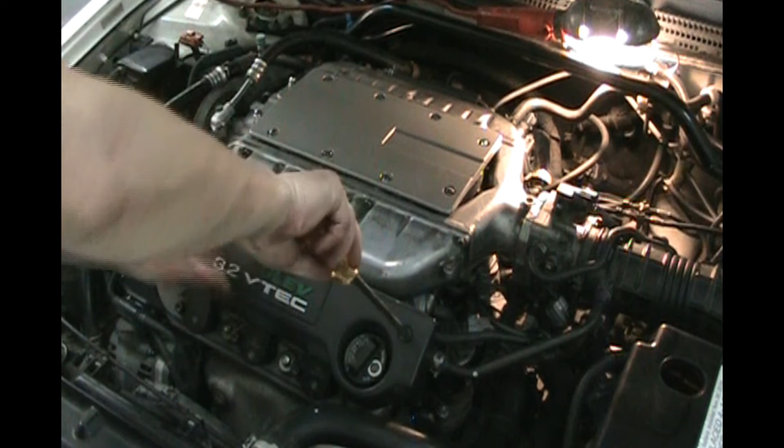Okay, now for the front beauty cover. Screws in at 12 o'clock position, turn 90 degrees to the 3 o'clock position, and that one's not going in. There we go. Now for the top beauty cover.

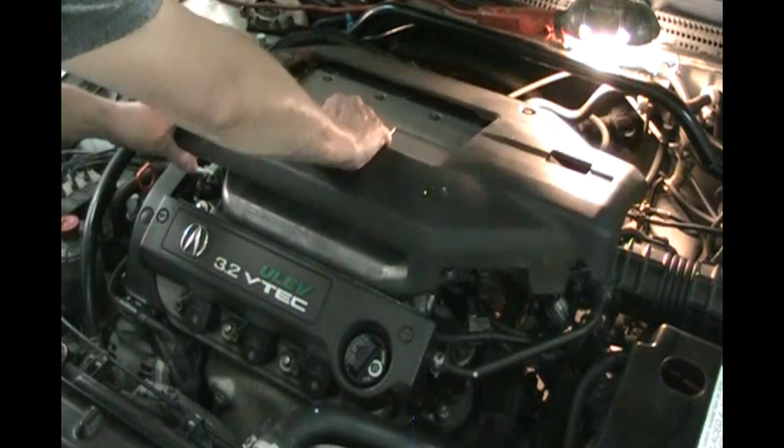Four screws, 4 bolts, and they are all 10 millimeter. It's just a plastic cover. We don't need to torque it a lot, just to keep the cover from blowing away. Torque all 4 of them. Okay, now the beauty cover's on. So, look around, see that there are no spare parts. Everything should be buttoned up now for a test drive.

Okay, let's cold start this thing, see what it sounds like. Okay, sounds good. I think we can call that job done.